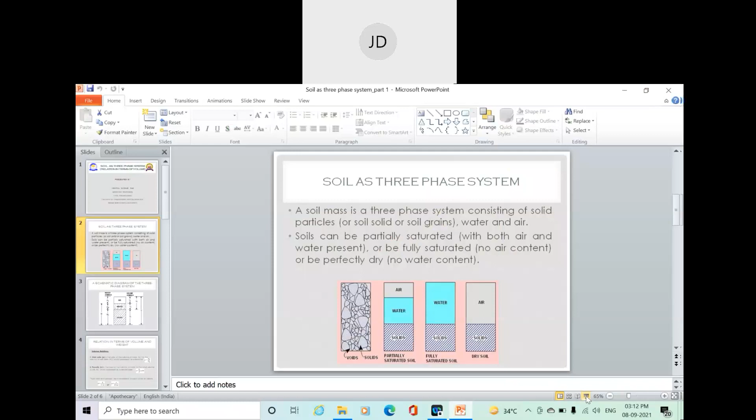So depending on the site condition, whether there is water present in the voids or not, we can have three states of soil. A soil may be in a dry state, known as dry soil. A soil may be in a fully saturated state, where all the voids are filled up with water. And the third one is partially saturated soil, which has all the three components, that is air, water and solid.

Now, in the second diagram, we have all three components present: air, water, solid. In the third one, only two components are present: solid and water. In the last one, dry soil, again two components are present: solid and air. From this diagram, the first observation is that whatever stage there is, one thing will always be permanent. That is solid. Solid हमेशा रहेगा. Solid will remain there.

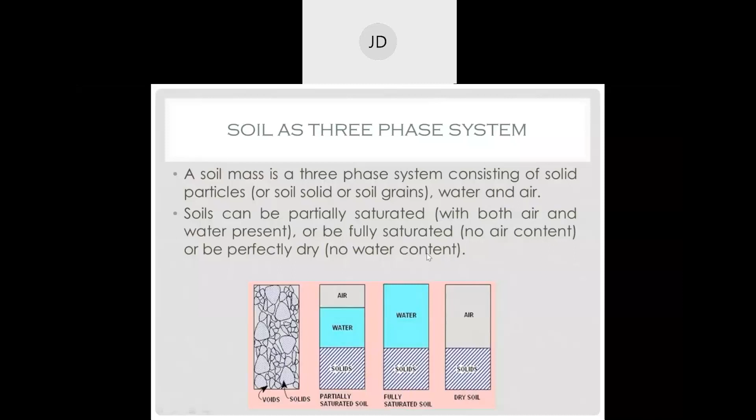Okay, soil solid and water. Don't write only soil, because soil actually represents the whole soil mass. Specifically, you have to write soil solid or soil grain. Okay, I think these things are clear, right? So whatever we have discussed in terms of volume and in terms of weight, these things are present here.

A schematic diagram of the three-phase system. Suppose it is a partially saturated soil where solid is present, water is present, and air is present. Now, if you represent the weight and volume of individual components of a particular soil mass, it will be like this. If somebody asks you to draw a phase diagram of partially saturated soil, it will be like this. This is in terms of weight. This is in terms of volume.

Now, if you consider volume, this V represents total volume, Vs represents volume of solid, and Vv represents volume of voids. This volume of voids is a summation of volume of water and volume of air. And total volume of voids plus volume of solid represents total volume. On the other hand, this is your weight of solid. From here to here represents weight of water, and this represents weight of air.

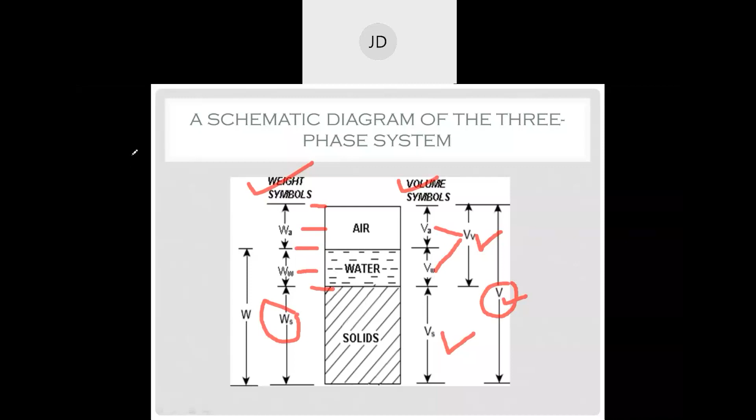Now, can you see some error here? Can you identify something is wrong about this diagram? See closely. What is happening here, what is wrong? Not wrong actually, but something is not right about this diagram. The weight, sir. Weight means what? Can you explain it? The total weight. Yeah, very good. So this total weight is not coming to the top. It is just up to the water, right?

Because in soil mechanics, the weight of air is neglected. It is considered as zero. So in terms of weight, air is considered weightless. That's why total weight will always be the summation of weight of solid plus weight of voids. Weight of voids is basically weight of air plus weight of water, but here the weight of air is neglected. So the weight of voids is equal to weight of water, and total weight equals weight of solid plus weight of water.

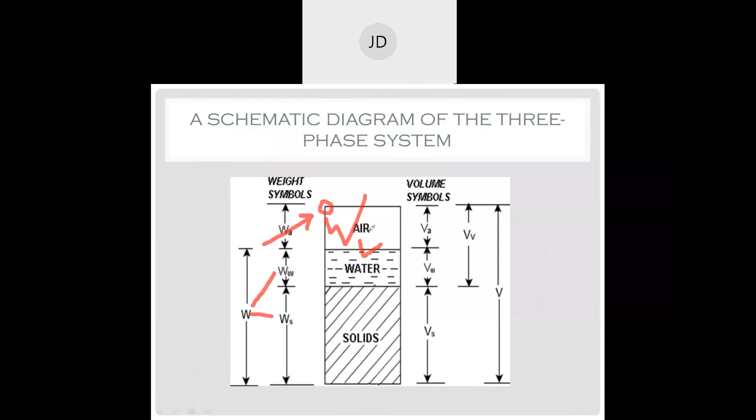But it is not the case for volume. In terms of volume, there is a volume of air, but in terms of weight, the weight of air is not considered, since it is very negligible. Okay, so I think we can stop here.

Okay, about some parameters like void ratio, porosity, degree of saturation, air content, percentage of air voids. Let's discuss these things and then we can conclude. There are some parameters based on the phase diagram. If you understand this phase diagram, we can find some parameters of soil: void ratio, porosity, degree of saturation, air content, percentage air voids. These can be derived from this phase diagram.

Now just see closely here. What is void ratio? Void ratio is represented by the small letter e, and it is the ratio of volume of voids to the volume of soil solids. It is expressed as a decimal or fraction, and the representation is e = Vv / Vs. So if you know these parameters, you can find the void ratio.

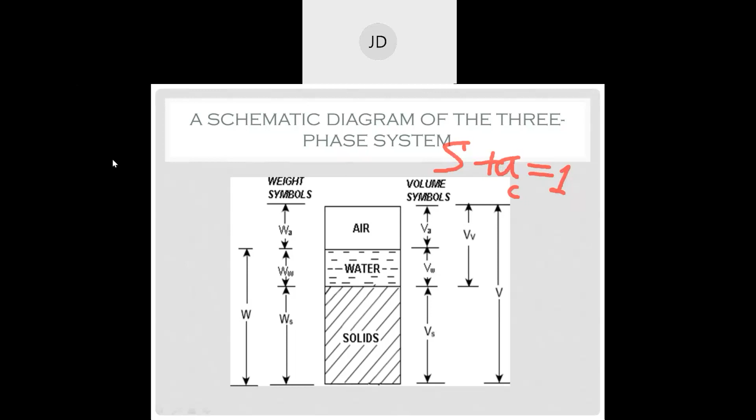So let's go back to the diagram. Percentage air voids represents volume of air by total volume. So volume of air voids divided by total volume gives the percentage air voids, represented by Va by total V multiplied by 100. And the relation between air content and percentage air voids: percentage air voids is equal to small n multiplied by ac. Small n is your porosity, and ac is air content.

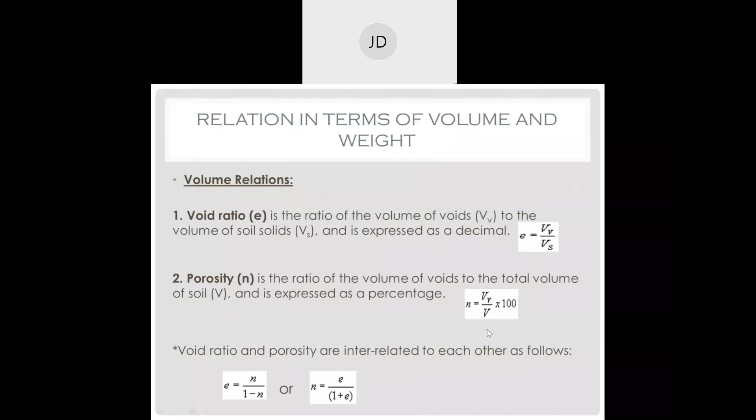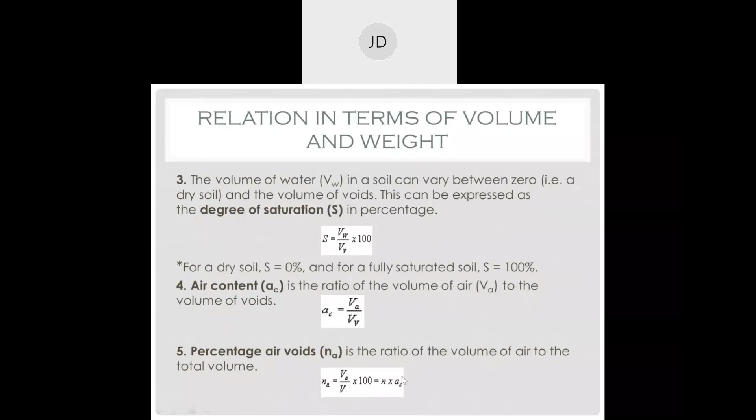You can also check mathematically. Put the value of n, which is Vv by V. Then multiply Vv by V with Va by Vv. Finally, we get the percentage air voids, that is na. That's why this relation comes: na, percentage air voids, is equal to porosity multiplied by air content. This is also a very important relation. So these are the parameters based on the volume of a three-phase diagram. These parameters are very important.